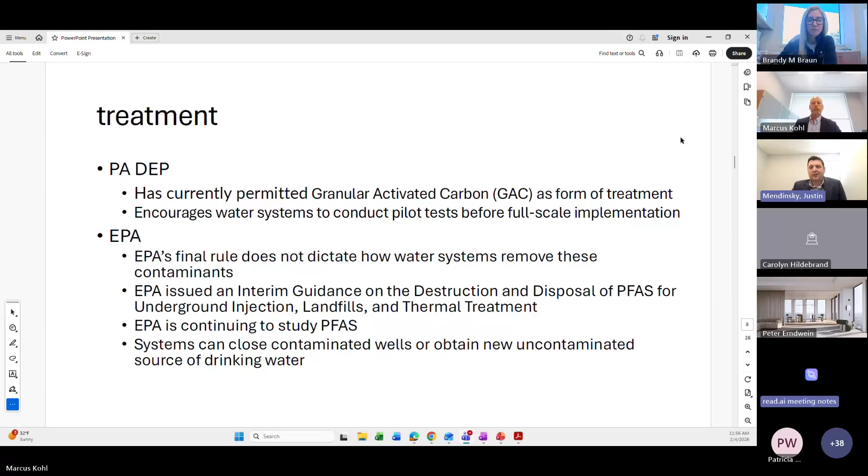Not a lot of time meant to be spent on this particular slide, but the take-home point here: there are a number of different organizations, regulatory agencies, of course, like EPA, but professional organizations that have been kind of at the forefront on identifying the treatment technologies and helping to provide guidelines for what we need to do with these emerging contaminants.

Again, utilizing a lot of technologies that have been around, but definitely getting into the weeds a little bit on how you would go about sizing. What kinds of tests do you want to be running on your source water or your finished water where you're thinking about treatment to make sure that you're implementing the right technology.

So, a good Google search will certainly help you to find those. There's a few shown on the screen here, and for sure many, many others that I did not list, but I just wanted to provide a little comfort that there are those agencies out there looking to help all of us through this.

So I mentioned a couple of minutes ago about pilot testing. And again, pilot testing I find to be extremely important for any type of water treatment system. Of course, with PFAS being new with the regulations, I would certainly recommend it. In fact, I don't just recommend it in Pennsylvania, it's required in Pennsylvania. So I'm going to jump into that a little bit here.

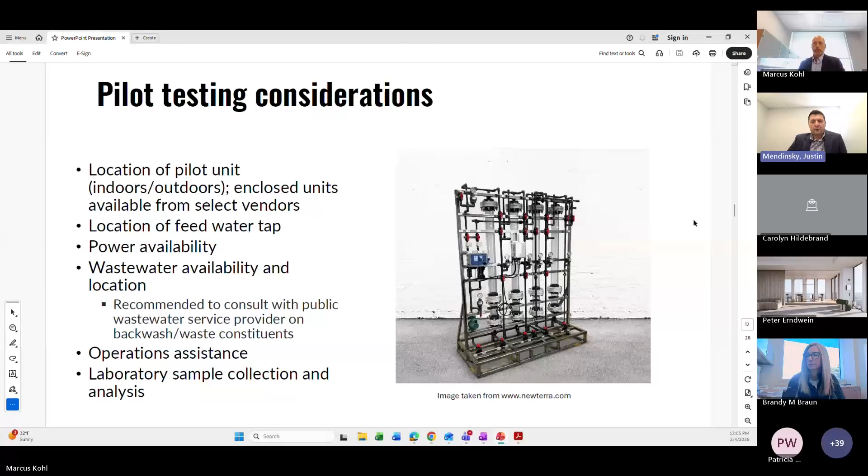And with any of the systems that we talk about, wastewater availability. So one of the downsides of having to treat for PFAS and remove it from the source water is that it ends up somewhere. And usually that's in the wastewater. So we've got to give some consideration to how we handle that wastewater stream and divert that away from the drinking water treatment facility there. Next slide, please.

Just some other considerations that we're seeing here and want to be mindful of. I recognize that not all drinking water systems are similar, both in size or complexity. All of your systems are a little bit different. It's not one size fits all. So we want to recognize the fact that surface water systems, when it comes to PFAS treatment, are certainly different than your groundwater systems. What we're seeing here for the surface water type systems, they're generally going to be larger. And I think that's pretty self-explanatory in some respects.

If you're utilizing a surface water, say coming from the Susquehanna River, or the Delaware River, or the Schuylkill, some of our main ones here in Pennsylvania, you're probably doing so because you have a relatively large demand, and you can kind of understand that therefore a PFAS treatment system for that type of surface water system might be a little bit larger than, say, a smallish groundwater source.

Again, I mentioned the type of PFAS that's targeted for removal. That's certainly important. Go into Brandy's discussion on testing. That's where it's beneficial to really understand the types of compounds that are in the water, and then we can be sure that the type of treatment technology that we're investigating is suitable for removal of that particular compound.

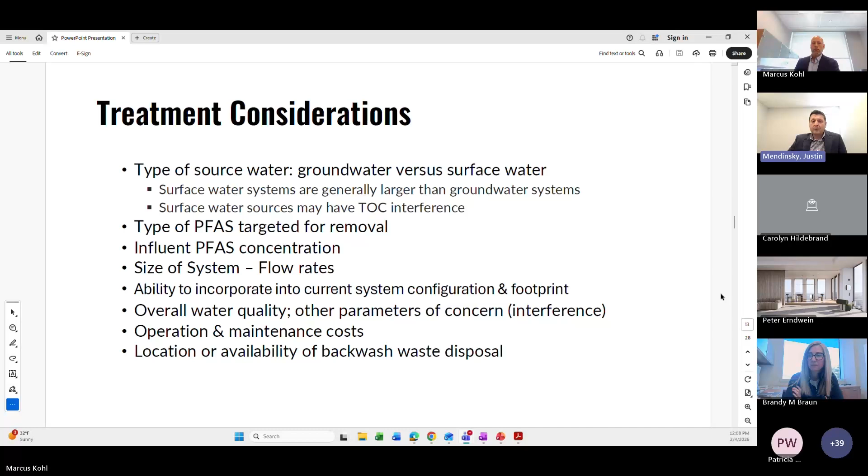And of course, the other objectives we want to keep in mind: what's the water quality that we want to obtain? Are there any other types of parameters of concern, such as interference? What's the operation and maintenance? I know we're going to end our presentation today talking a bit more about some of the costs that we're seeing here. And of course, as I mentioned, the backwash waste disposal of critical importance.

I'll have to speed us up perhaps a little bit. Again, I mentioned I love this kind of stuff, so I could probably get into it all day here, but I know my stomach is getting a little hungry, and I'm sure most folks are too.

These are again typically supplied with a number of different instruments and valves, such as flow meters or electrically operated valves that can be pre-programmed in terms of when they open and close and initiate backwash cycles. A lot of times we'll see these installed in a lead-lag configuration, meaning it'll go through one vessel to the next and therefore continue to remove PFAS through each subsequent stage of the treatment.

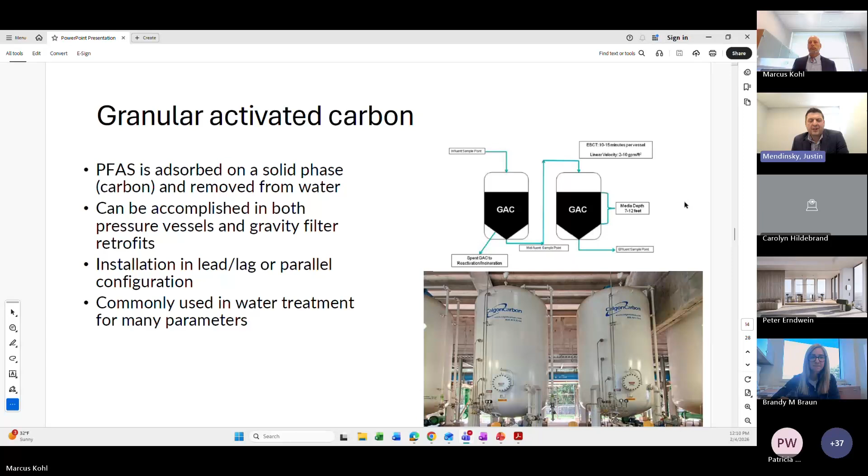If it requires multiple passes through to achieve your objectives, that can be done. But a lot of times when one needs to be taken out of service to replace those carbon media beds, you can still achieve your treatment by keeping just one of them in service. And again, as I mentioned a number of times, GAC is very commonly used for a number of different parameters, and I think pretty widely accepted throughout the industry, and lends itself well to PFAS.

They can require a pretty large footprint, though depending on your flow rate, maybe they're not necessarily as large as that photo I showed a couple of slides ago. There is an opportunity to retrofit conventional sand filters to utilize the GAC. But again, I think what we're seeing predominantly is that these are going to be in more of a pressure configuration in those types of steel contactors that we showed on the previous slide.

Some of the disadvantages with the GAC: because it works so well at removing a number of different compounds from drinking water, we are finding that there can be some competitive adsorption. So if you have a surface water source that's really laden with TOC, it's going to do a great job at removing that TOC, but ultimately that might be reducing some of the PFAS removal efficacy as the TOC or those other compounds start to take up those pores and adsorb onto the GAC. Quite honestly, it takes up some of the spaces where the PFAS would be removed.

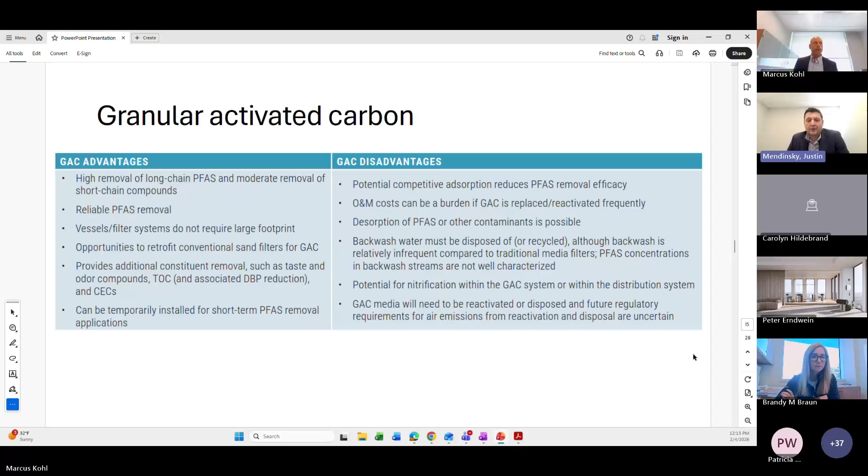And O&M, really for all of these systems, I think we're going to find that the O&M costs are pretty substantial. Folks really need to properly plan for that and make sure there are no surprises. With the GAC, when ultimately that media is expired, you have to replace it. And that's a cost both to dispose of the spent media, but also the labor and the cost to bring in the new media. Next slide, please, Marcus.

Anion exchange, I'm just going to jump right into this. It's a very similar type of technology, utilizing most times pressure vessels, but the media within the vessels is different. So instead of having those activated carbon beds, it uses a selective resin, which is trying to reach out and grab those PFAS molecules and attach to them, therefore keeping the PFAS from going through in the treated water.

This has also been used for a number of years for water treatment. Some of my clients have used anion exchange for a number of years on nitrate removal, and that process works very well. So they're very familiar with this type of technology, which again lends itself to PFAS removal. So it's pretty similar in terms of the makeup of the system. You've got those large vessels. You've got a number of different instruments and automation with the valves.

Some of the disadvantages, again, are kind of similar with all these systems. We're going to see some increased O&M when we have to replace the spent resins here.

There's the cost associated with that. Just like the GAC, there's a waste stream when you go into a backwash mode, and we have to ensure that we're properly disposing of it. And a lot of times that's going to pass down to our wastewater treatment facilities.

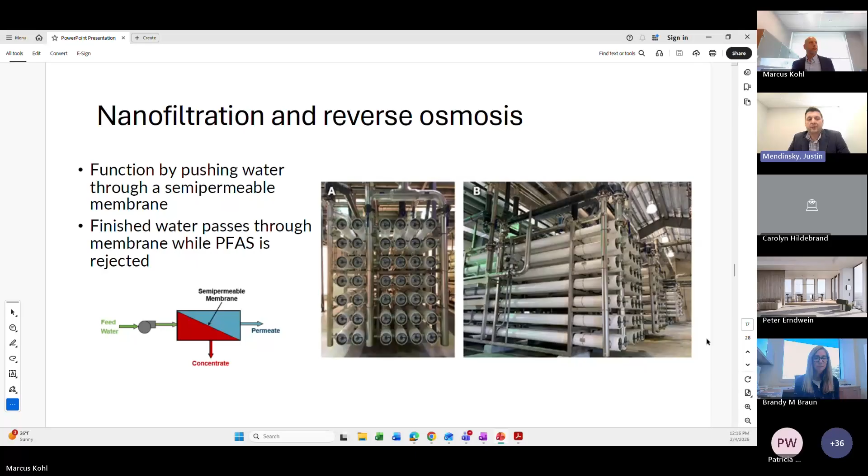Advantages, as I just mentioned, it's been around, it's been used, it's effective. Disadvantages, I think I've hit on those as well. One of the downsides is it does create that concentrated stream that's going to be heavily laden with PFAS. That's going to have to be discharged and addressed. So something we have to keep in mind there.

And a lot of times what we find with these systems, because we're needing to push the water through such a small opening, it requires a lot of energy to do that. So some larger horsepower pumps, perhaps the way those have to get implemented into the treatment technologies will change something that's already existing in the plant. So we do see these as being a little bit more energy intensive, and therefore increasing the O&M costs specific to electrical power consumption.

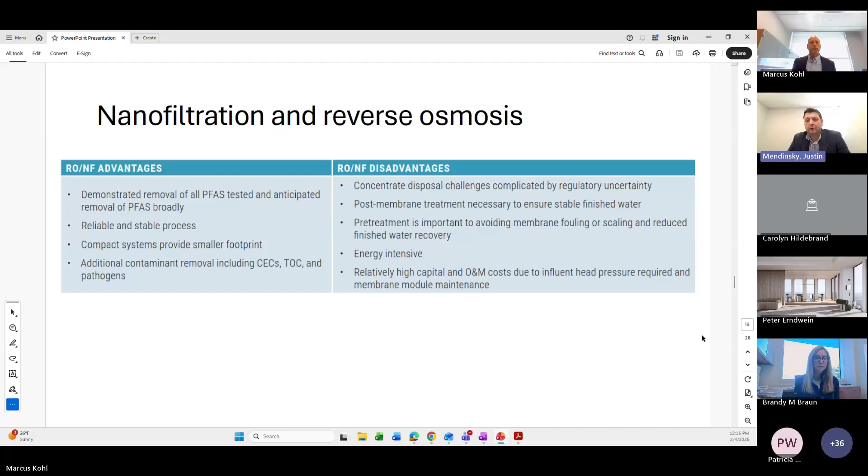A couple more slides and I'll turn it over to Marcus here. But just some of the things that we're seeing here, both at our consulting firms as well as providers such as Pennsylvania American. What we're seeing here, surface water systems, they're proving to be a little more challenging when it comes to treatment. And I think that's just really due to the size of the facilities and the types of demands and the flow rates that we're talking about when it comes to surface water.

And also the fact that you can see variation pretty quickly in surface water. If you have one heck of a rainstorm and you've got some flooding conditions, that water quality changes very rapidly and can certainly have a great impact on that treatment system. The costs are definitely higher, what we're seeing here for the surface water systems, because of all those factors.

Hydraulics, again, I've mentioned that. Really need to take a good look at the plant hydraulics to ensure that the implementation of the PFAS treatment system doesn't negatively impact something downstream from it. So it could result in a change of pumps or something that then passes that to the storage or the distribution facility. Really have to take a good look at that and understand the hydraulics of that treatment system during your pilot study.

And I believe it was pretty well mentioned by Brandy at the start here, GAC becoming more of a standard, if you will, for the folks on the presentation here with me, just because we're seeing low fouling and some pretty good performance in the pilot studies and in those fully implemented systems.

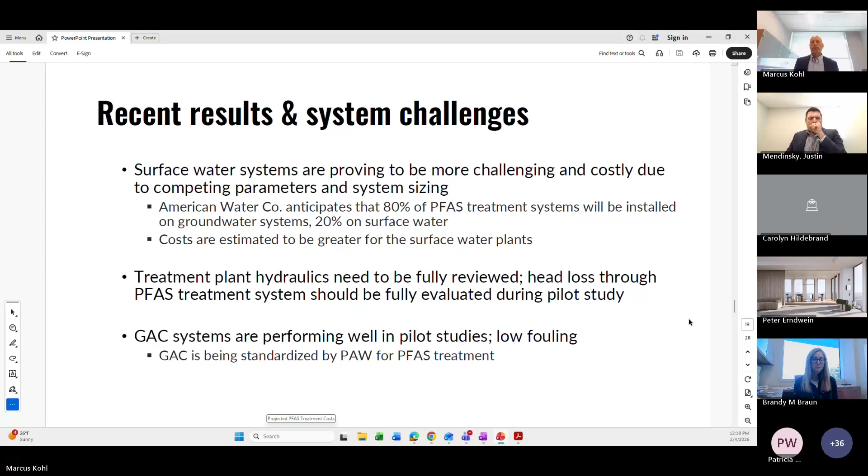And last thing for me, some of the other things that we're finding with these systems in themselves, these different technologies are pretty intense, right? There's a lot of things that we have to bear in mind when we size them, some factors for considering how to size it appropriately, the waste concerns, all of that. But then there's other things that we're realizing are kind of challenging too, that we wouldn't necessarily think of right off the rip. Accessibility concerns. So these are some pretty large vessels potentially. Where do we put them?

And how do we get to all the accessories that are on those? So we think about things like access and catwalks to be able to get around safely. The last thing we want to be doing is relying on the old extension ladder propped up against one of those steel tanks and someone trying to get up to an air release valve. So those are the kinds of things we need to give consideration to, making sure we have safe access to all the different components, and we certainly don't put our operations staff in harm.

Automation is key for these systems, being able to rely on something that can automatically initiate a backwash, open and control valves to reduce the labor and someone having to really pay attention to when that should happen in a manual fashion. We want to be sure that we have the right amount of automation and controls.

Influent flow meters, we're finding operators really prefer to see those. Most of these systems are typically equipped with a flow meter. If it's a pressure vessel like the GAC, for example, a lot of those are going to be equipped with a flow meter at the bottom, which is on the outlet side, if you will, of the contactor. But a lot of the operators are finding that they prefer to see flow meters into each of the vessels. It helps them understand the treatment through each, and helps them to make sure that they're able to dial in a little bit better.

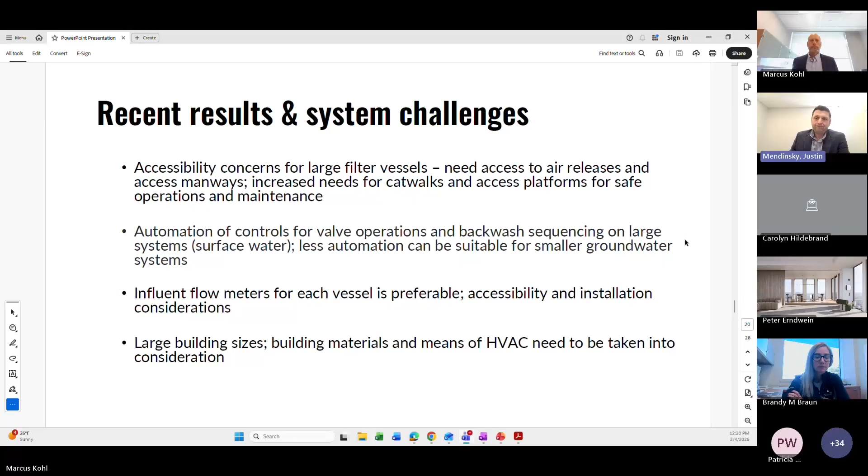And one of the last things here, some of these large buildings in themselves, we think about what are the materials that are needed and how the heck do we heat these buildings, in times like we have currently with 5-degree weather when we wake up in the morning. So we don't necessarily always give consideration to the HVAC or the ways to maintain a building. But when you're putting in these large contactors, we're obviously seeing that that's something that can raise the O&M costs. And Marcus, I believe I'm turning it over to you on the cost here.

All right, thanks, Justin. We'll let you catch your breath. I do appreciate Brandy and Justin giving a very detailed overview of the complexity of this rule and the solutions to maintain it. I'm going to cover costs. Hopefully, this is of interest, and I'll try to speed up my presentation to make sure we have maybe time for a question or two.

But as you can see here, cost estimates vary greatly. Anywhere from $1.5 billion from EPA when they finalized the rule to the American Water Works Association estimate of about $4 billion to over $5 billion. Keep in mind that these estimates are a couple years old. And as we all know, things have only gotten more expensive over the last few years, and demand is peaking, right, as additional systems are needing to add treatment. So while these estimates are huge numbers, keep in mind that they may even be higher at this point in time.

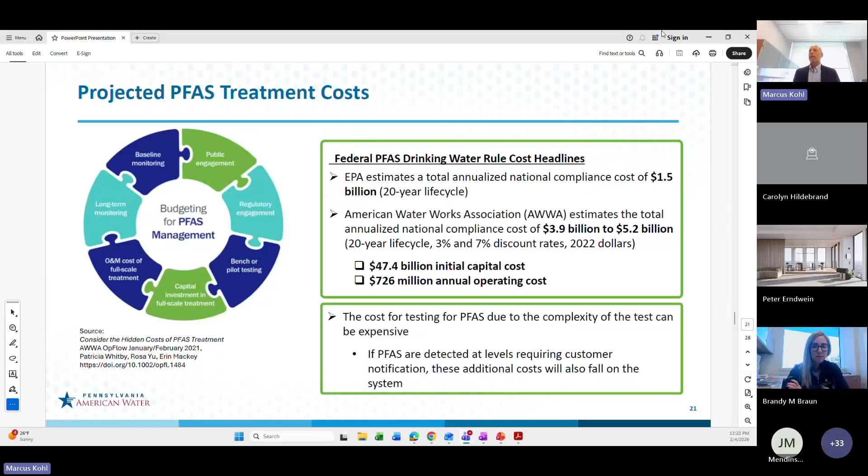Notably, we're looking at a significant amount of that in initial capital costs, and there is some federal funding available to communities for that, but recognize there is not nearly the amount of federal funding that there is as far as need goes. And that funding is for capital costs for the construction of these facilities. It doesn't take into account annual operation costs, which skyrocket the cost of this. And in the next slide here, we'll get into the cost to customers, right? So a recognition that this is going to be a challenge for systems to figure out how to do all these things from a technical basis and then pass those costs on to customers.

And so, this is a local decision, quite frankly. I was intending on, if there was a little more time, kind of asking folks to raise their hand if they were aware of what their PFAS level was. But essentially, these are questions that you need to wrestle with. And as Justin and Brandy, I think, highlighted, this is a really, really challenging situation, one that a local community can really struggle with, especially a smaller community. And so, there are options, there is treatment, and a lot of systems are going to choose to add that treatment and work with local engineering companies in order to add that. There are others that may shut down wells or purchase water.